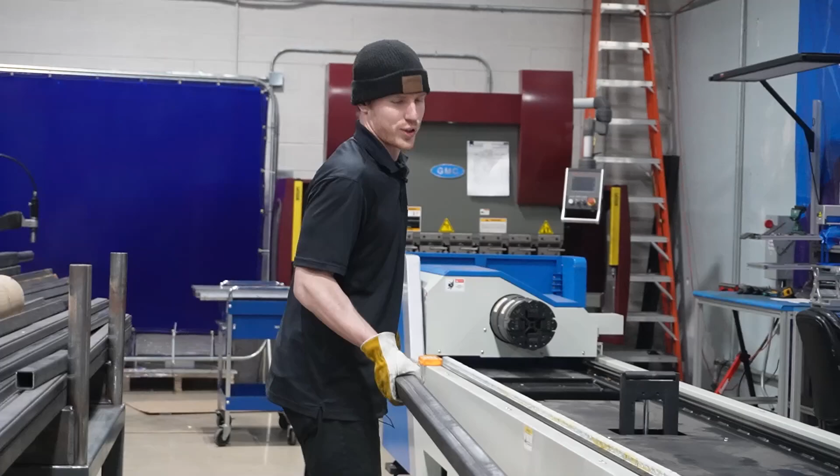First, we gotta load it up. I only have one holder up.

In the realm of industry's future, two apprentices embark on a journey. Their path to becoming fabricators of Industry 4.0 unfolds. This is their story.

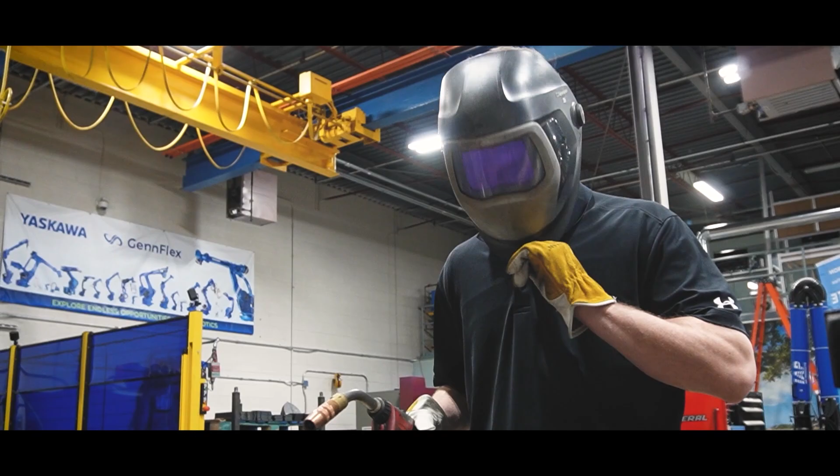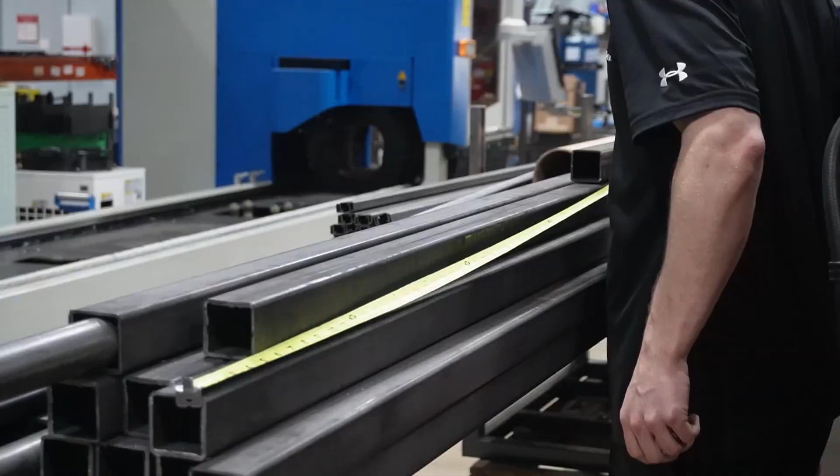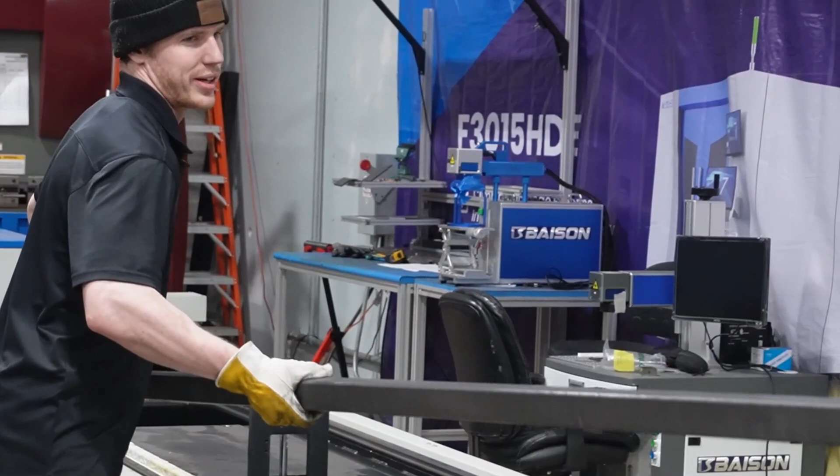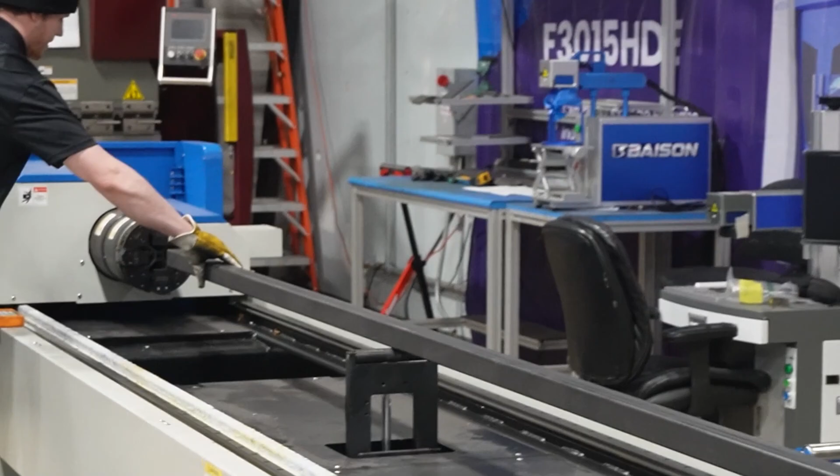All right, let's chop some tubes. First things first, gotta load it up here, put our holders up, especially if you're a little crazy like me and you wanna load it by yourself. We're gonna clamp it into the chuck here. And we're gonna use our controls here. Bring our tube into the cutting area.

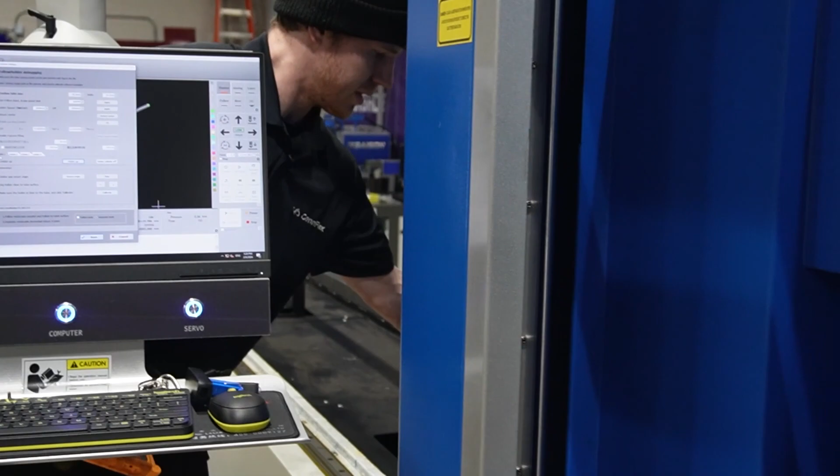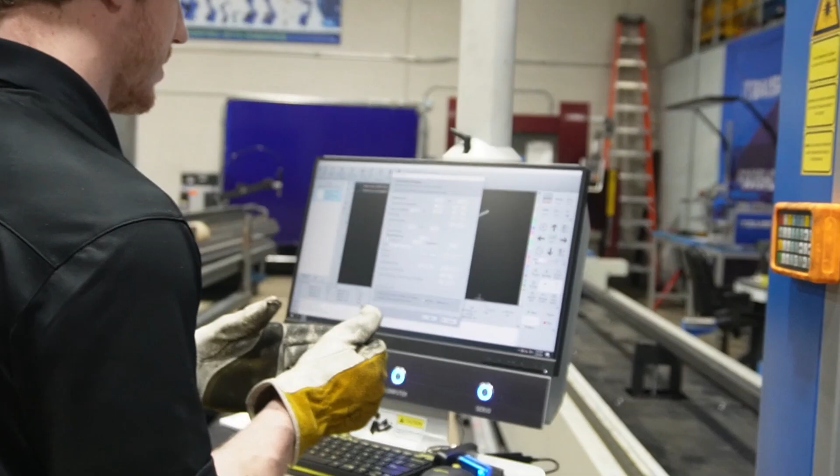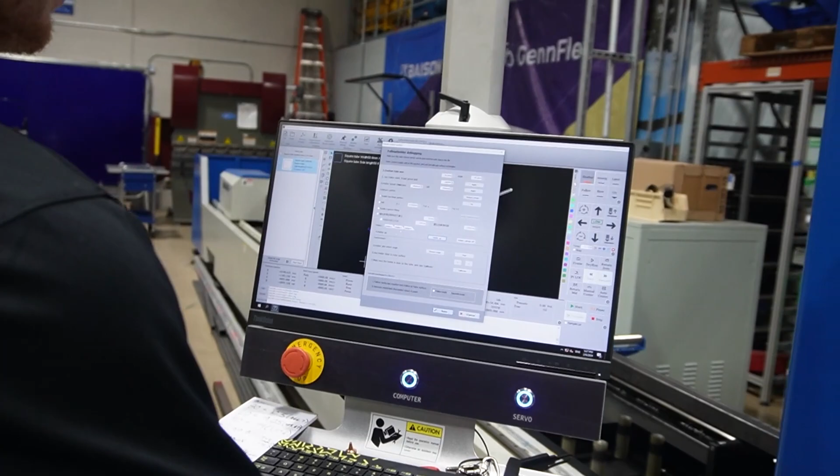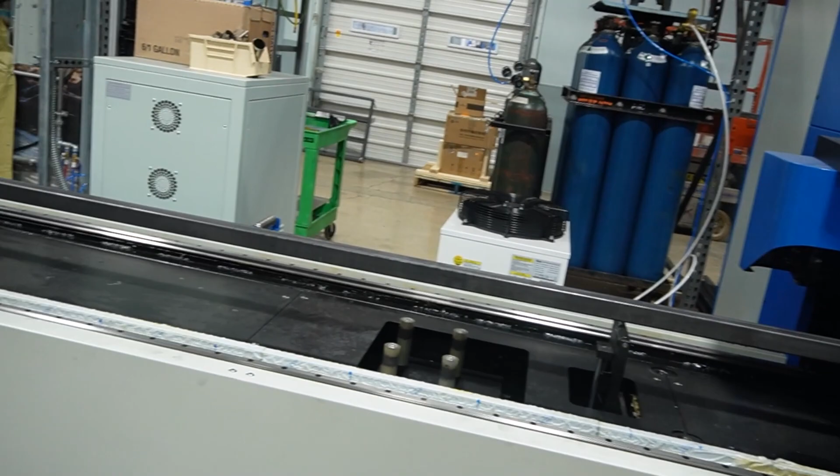And once we get through that last chuck here, close it up. And from here, we're going to calibrate our part holder. So you just want it so it's supporting your part and it's not flexing it too much. Looks good to me. Save those settings there.

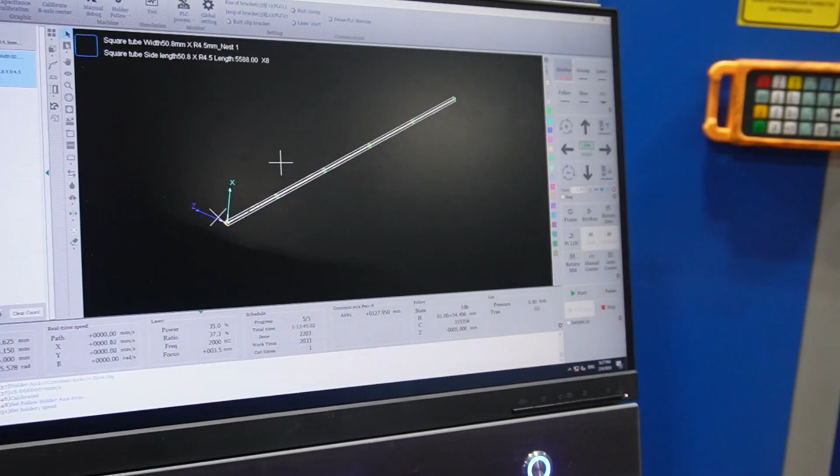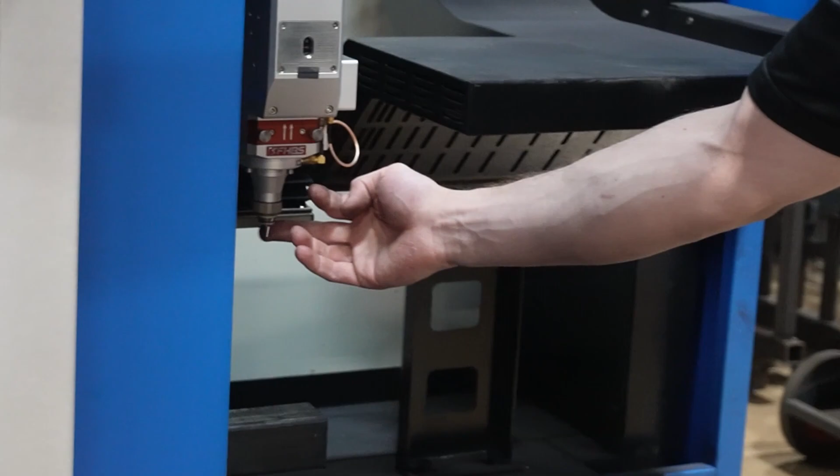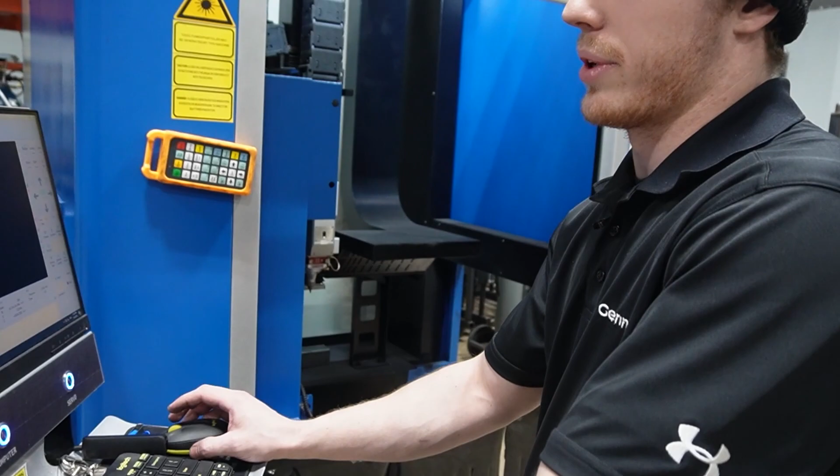And here it's telling me I can get 1, 2, 3, 4, 5 pieces out of this roughly 20-foot tube here. And on this program, it's going to be using nitrogen and oxygen on this dual nozzle cutter here. And now, before we cut, we're going to calibrate it. And if I had been doing this material all day, I wouldn't need to calibrate it. Since this is my first time cutting this tube today, we're going to have to do some calibrations.

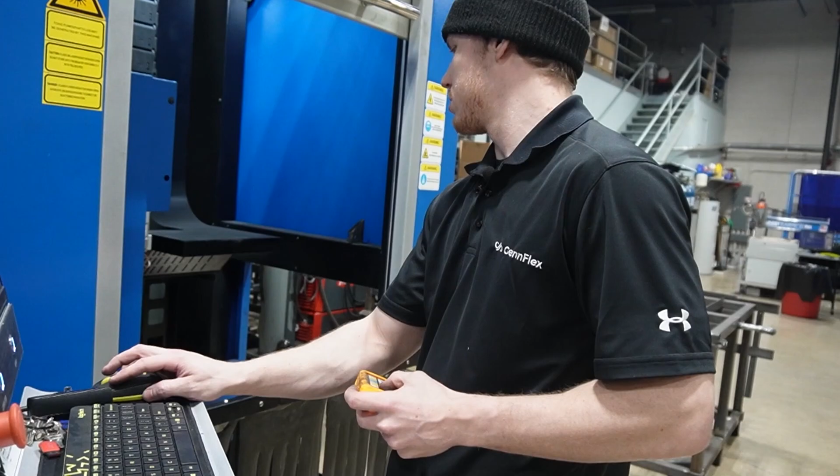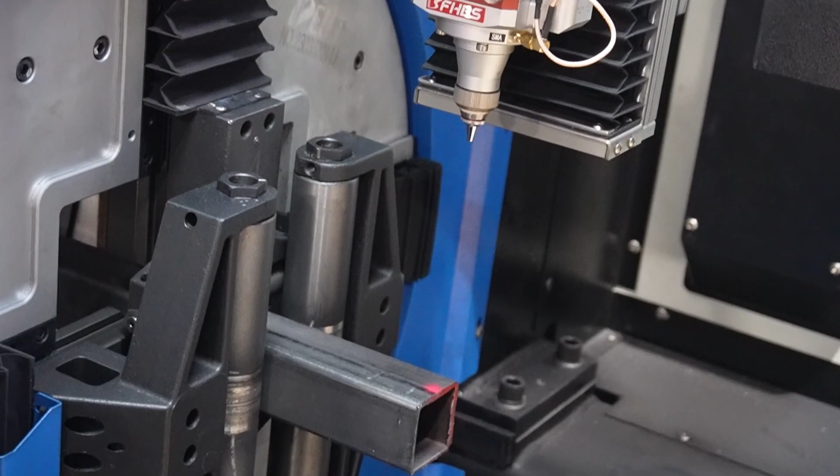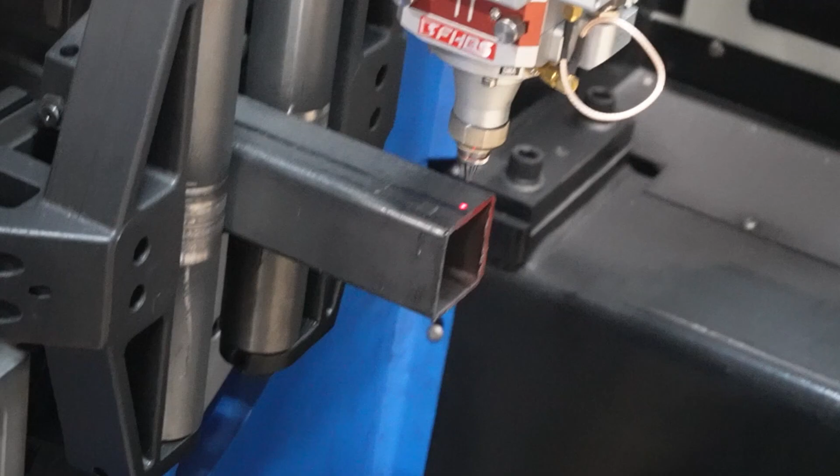It's important that you're able to see this red dot here in order to do any calibration or finding the center on your part. So first things first, we'll calibrate it. And before I do anything, I'm going to bring the actual nozzle down to the part, about an inch or so off of the part. And then from there, we'll calibrate it, make sure that these numbers match what our program's saying. And they do. Actually, there we go.

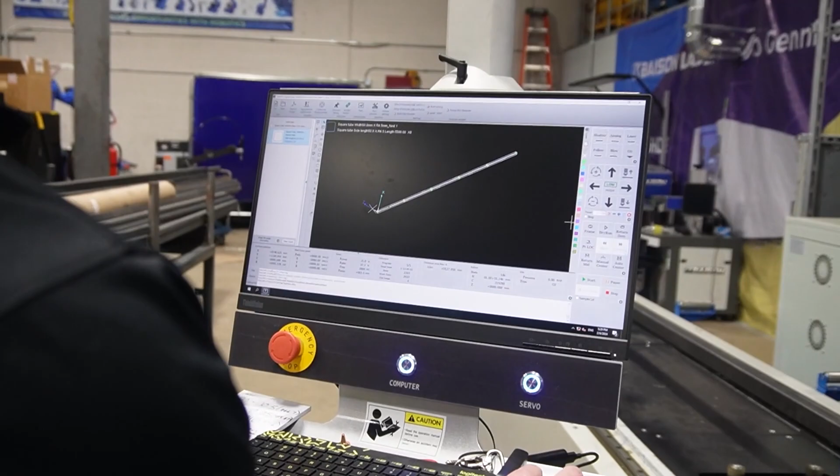All right. The final step is just to find the center of our part. Again, make sure our numbers here match what our program is saying.

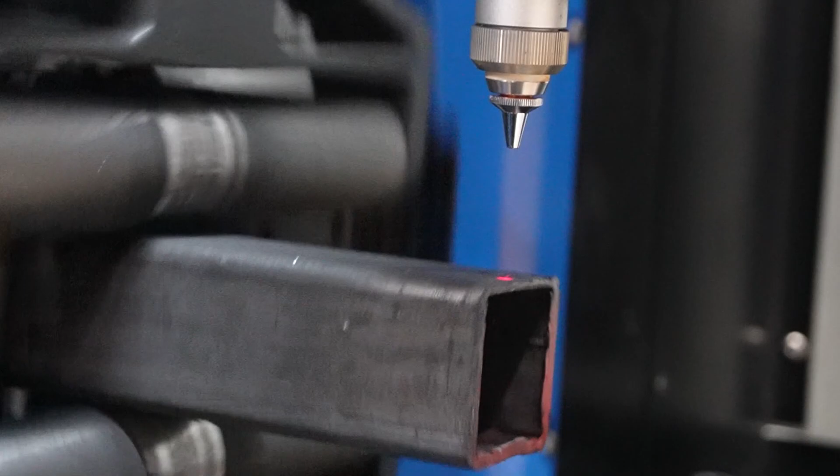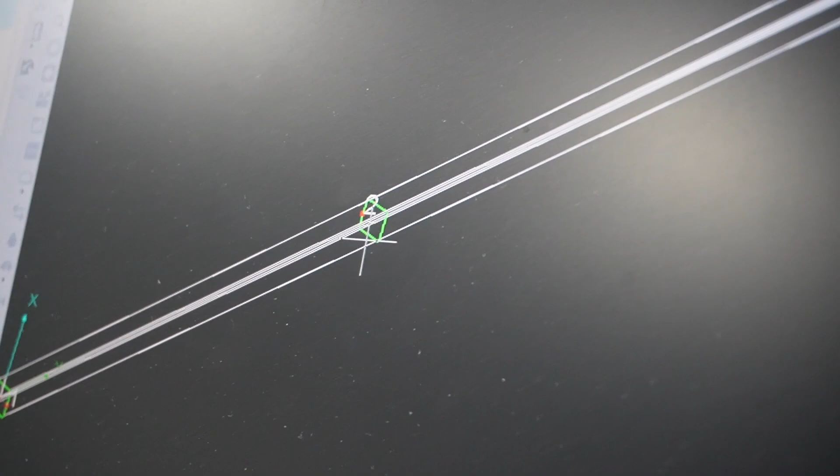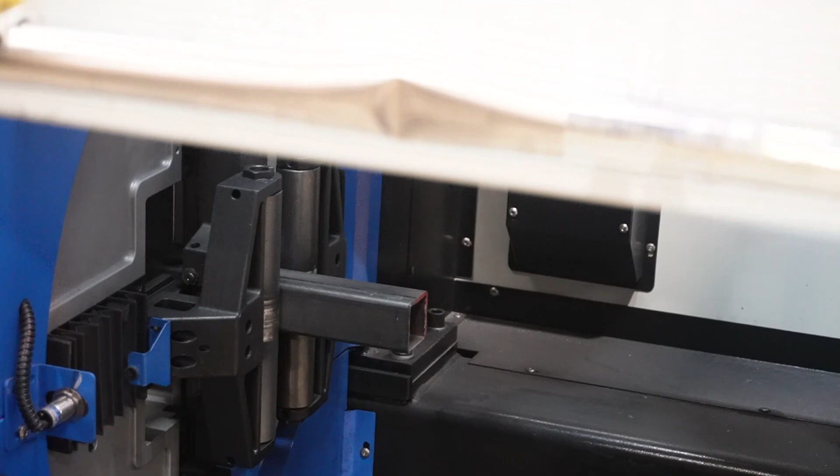All right, so one little feature I want to show you guys before I start the cut here. These little red dots on these green lines are the indication of the cut. The red dot there is that it's going to find the center before it makes each cut. And that's just a good way, especially when you're cutting a lot of pieces, to have good consistency throughout each part. So with that being said, if I leave this red light on before I cut, it's not actually going to cut. It's a little safety feature, so we're going to turn that off. Close our door here. And we're good to go.

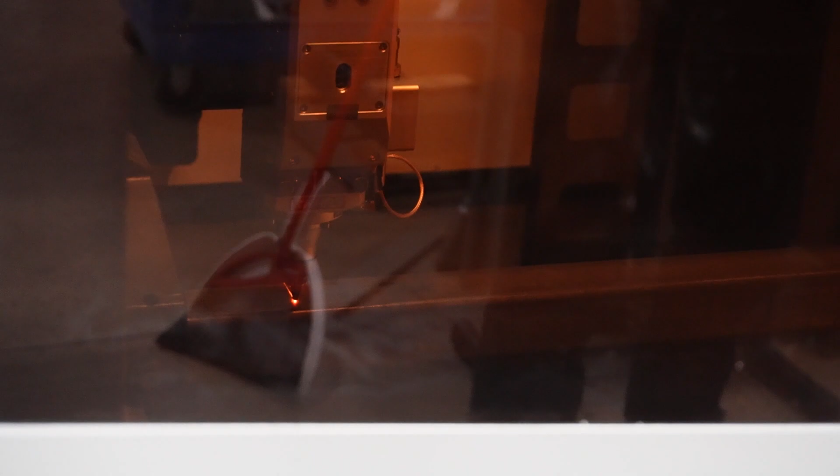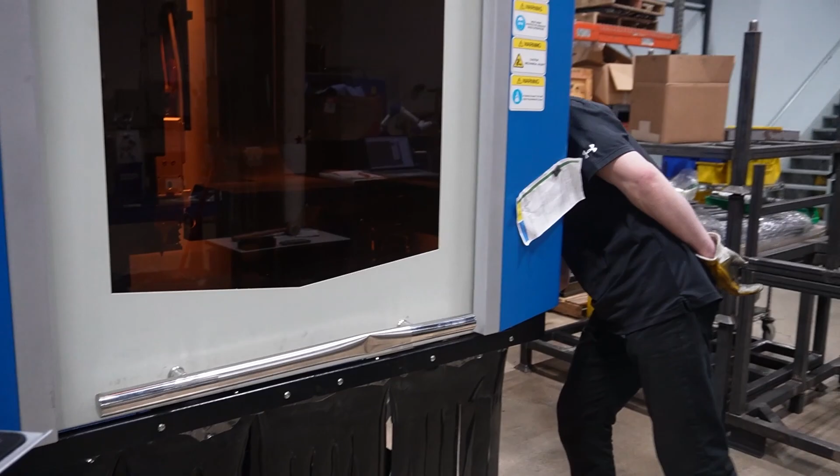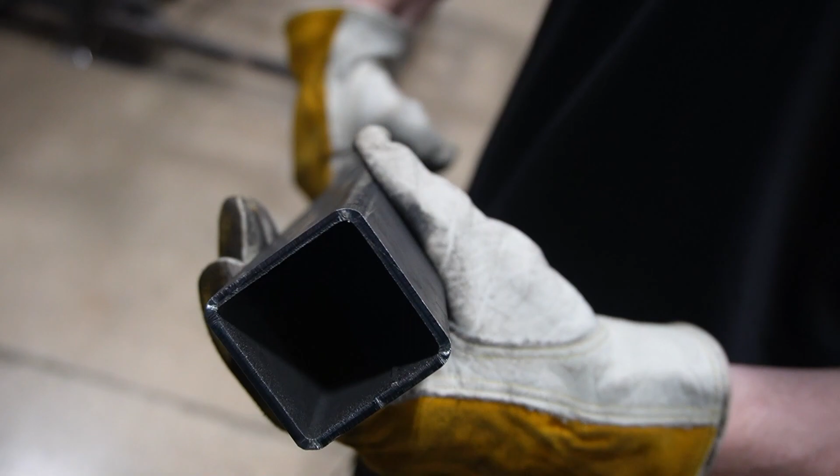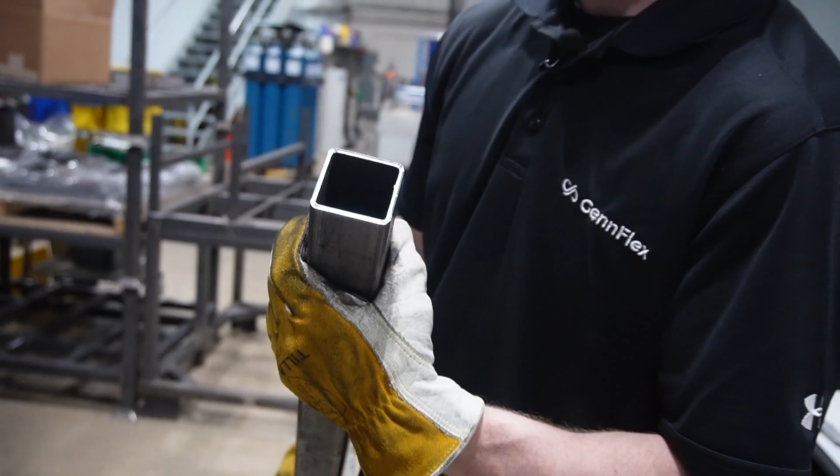Now that it's done cutting, one of the things that we like to look at is the actual cut itself. You want to look for any discoloration or anything that looks abnormal, especially on your radius here on the edges, since the metal gets a little bit thicker and harder to cut through. And if there are any issues, just go right in here into your layers. And that's where you can change all of your different cutting parameters. And yeah, that's about it.

So since the beginning of this journey, I've learned a plethora of different skills, from welding to metalworking, working with the press brake, the laser tube cutter. And all those skills have been very, very resourceful for me. What I've learned since my journey started is a lot of hand welding skills that I didn't have before, like MIG welding and TIG welding, using the laser welders. Those are pretty vital moving forward in the manufacturing business.

I've also learned how to write programs for the robotic arms to be doing individual tasks such as welding jobs, movement of objects, placing objects in certain locations specifically. But I think the most important skill that I've acquired throughout this whole journey is the importance of fixturing and setting up your equipment properly before actually running anything.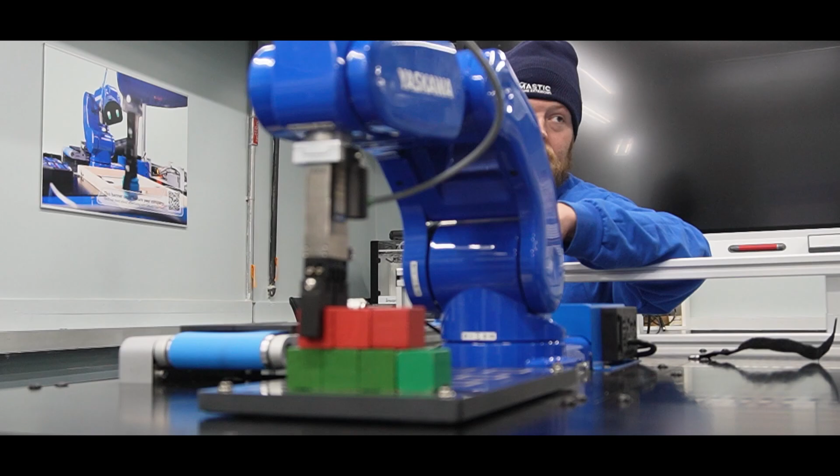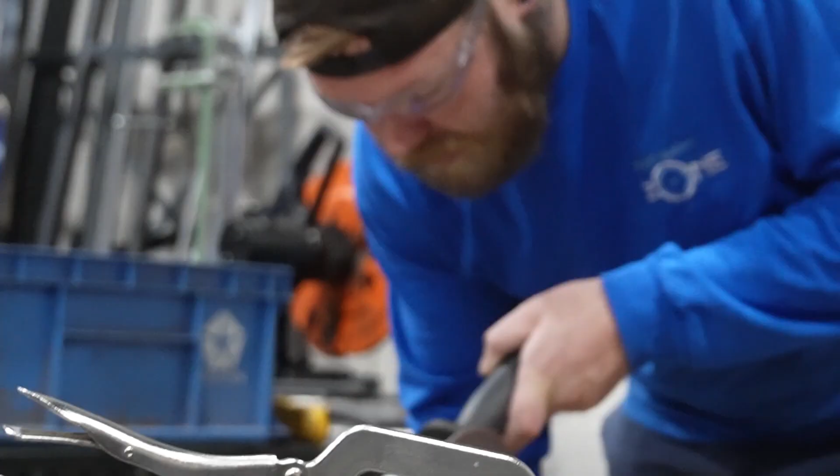In the realm of industry's future, two apprentices set out on a journey from robot basics to robotic arc welding to laser welding and laser tube cutting. Their pursuit to become fabricators of Industry 4.0 continues with each and every challenge, promising endless opportunities ahead.